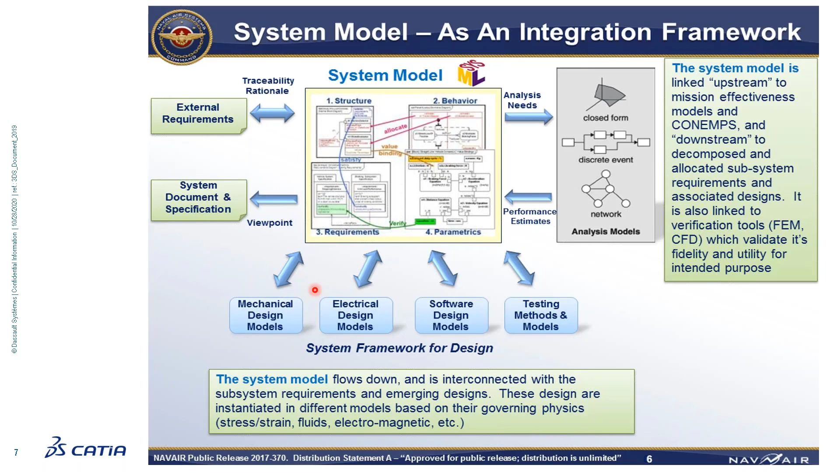So to get into this, we have to talk a little bit about what systems architecture is and what it means and what is a system design. And so the things we talk about here at Dassault Systèmes come from the International Council on Systems Engineering Handbook, that's INCOSE's handbook. And we talk about system architecture, the creation of a high level or abstract understanding of what it is we need to design. And eventually that systems architecture then becomes a system design. And that gets oriented through the logical, physical, structural elements, the details of what I need in my system to meet that high level system architecture or concept of operation.

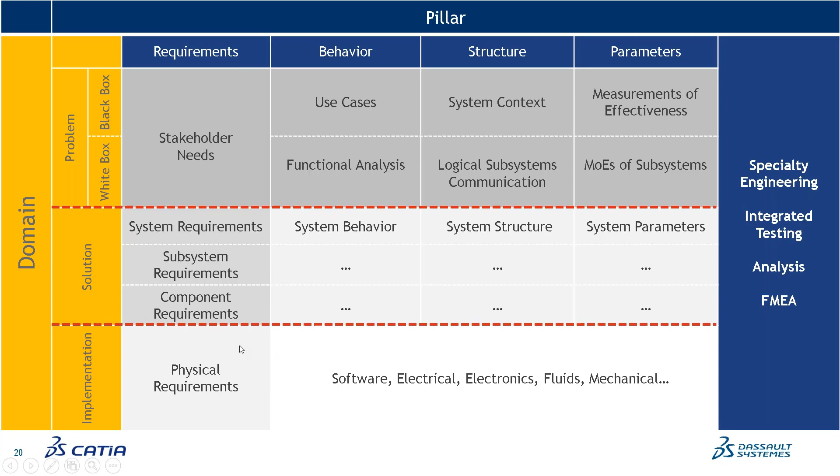So taking this one step further, I'm going to break this concept into 3 layers here. And I'm going to talk about how we solve the first layer. Then we're going to look into how do we do the solution architecture and what we call a logical architecture through the preliminary design review. And then we're going to talk about how we get to the physical architecture and accomplish the critical design review.

So to begin with, we want to get to something called an SRR. Well, how do we do that? We start with some stakeholder needs here, and we develop those, we review those stakeholder needs, and we start talking about, well, when I read those requirements, what do I understand as the system that we would need to solve those requirements?

So I develop things like a use case diagram, an activity diagram, block definition diagram. I can further that with understanding some measures of effectiveness that I need in the overall system. Generally, the stakeholder has some high-level performance factors they need. And once I do that, I can break this down into some logical subsystem. And eventually, as I start doing my work, I can show traceability from the system context back through the use cases, back to the stakeholder needs.

And eventually, through all of this understanding, I can get to the systems requirements, a system requirement table, and a derived matrix that shows me the traceability between the systems requirements and the actual stakeholder needs. Well, that's all fine, but how do I actually do that in the model?

So I'm gonna come out of my presentation here and let's talk a little bit about Cameo Systems Modeler and how Cameo Systems Modeler works using model-based systems engineering in the systems modeling language. So this is the graphical user interface. This is the screen you use when we actually do system design here in Cameo Systems Modeler. And the big thing to look at here is this containment tree, over here on the upper left-hand side, and this shows us our model.

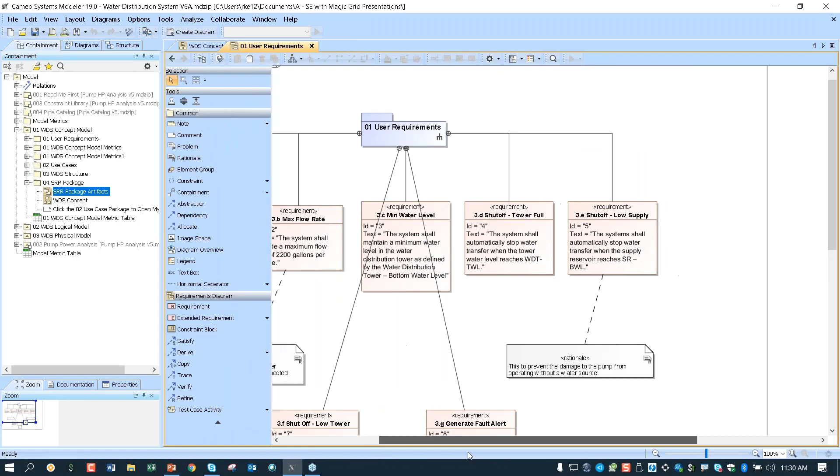And the containment tree shows me the relationship between things, but I'm just going to walk through the diagram. So here, to begin with, I had some user requirements, and I can express those requirements by this diagram. So here is a typical systems modeling language diagram with several sets of requirements, and I have some rationale associated with them. I can also express that in a table here, which gives me the name of the requirement and any rationale that I have on it.

And if I needed to here, I can modify this table, and I can show the text of the requirement. And so when I do that now, it added the text in the table here. But now I see the name of the requirement, what the text is from the user, and what rationale I have provided for these requirements.

So use cases. I said I was going to create some use cases. So the use cases are here in the model, and if I look at my use case diagram here, I can see the use cases that I have in the model. But if I go back in here, I can show from this diagram, I created these use cases. These use cases have some relationship to the requirements that I have.

So here's my user requirements, and I'm showing that these use cases are used to satisfy these requirements. And I use the relationship called refine to do that. And I can see that all of my use cases have at least one refined requirement to it, and all my requirements are represented in at least one of the use cases. So I'm doing some model checking as I'm going along to do this.

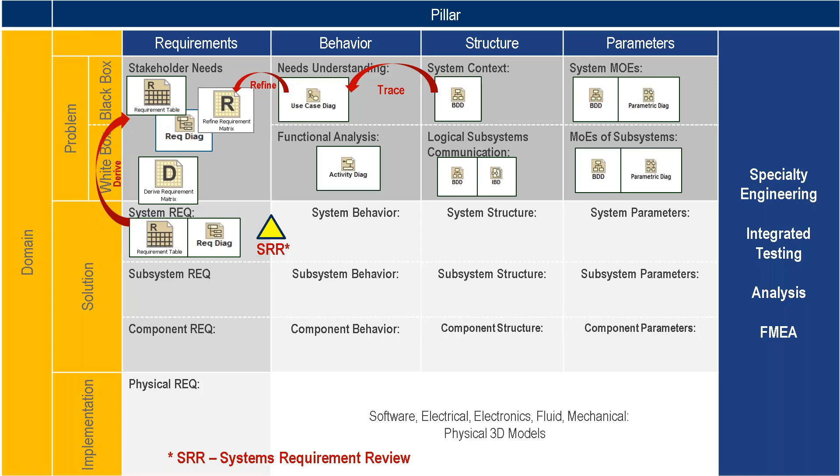So going back to my presentation here, I have gone through this analysis to get to here, right? So the next thing I want to do is work down to getting a preliminary design review. So this design review now requires us to build out the system structure, understand the subsystems, get the behavior and those sorts of things now.

So again, I work across these rows. I have requirements. I can understand reading the requirements. I understand what systems behavior I need, what sort of system structure I need, what sort of system parameters I need. These things have traceability. And from this system level, then I can also look at the subsystem level. What subsystems do I have?

When I make the system structure up here, I get to a subsystem structure. I look at the behavior I need to have, allocate that onto a subsystem structure, understand what parameters I need for the individual subsystems. And I understand now that I have these subsystems with requirements, and I have to trace from these individual subsystem requirements back up to the system requirements, so I can do all that and eventually get down to some individual components that I think I want to design and what the requirements are for those components.

So again, I can express all of this in my model, and I'm going to come out of this PowerPoint slide here for a second, and I'm going to go back into my design model. And we'll look here now at what the logical model tells us. What is the design of the system? What requirements do I have? What structure, what activities, what parametric analysis am I going to do?

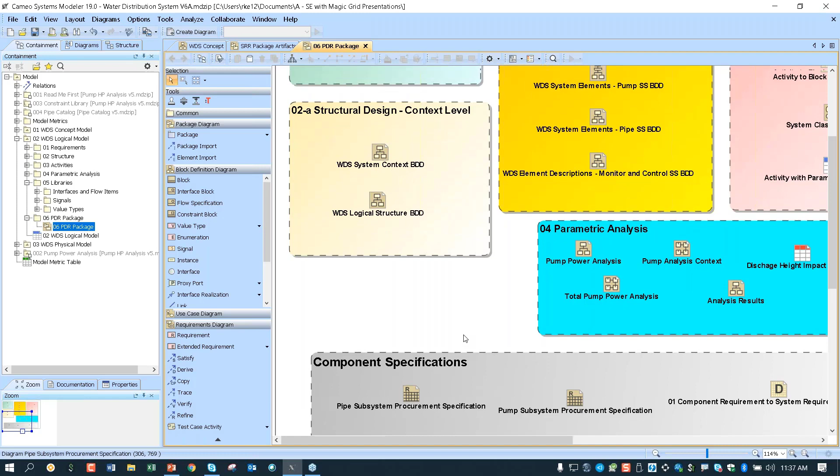So let's start up here. We have a systems requirement table. So these are the systems requirements, right? This is the systems requirements that I started with at the very beginning. From those requirements, I'll come back to the satisfy matrix here in a minute to look at the system elements that are there.

But now I would start to look at what sort of activities do I have. So here I may have produced, for instance, this little activity diagram that shows me which components of my architecture are doing which functions and how it does that. And just very briefly, these activity diagrams, state machine diagrams, things can be simulated. I'm just going to run through a quick simulation here so you can see how we do this. We basically walk our way through the design, and the simulator will check on how we do things.

It's going to ask me, oh, did you want me to turn on the pump? Is the water level below maximum? So if the water level is less than maximum, yes, I'm going to turn on the pump here. It's going to continue to work to detect water. Is it greater than maximum? I'm going to say no here, and I'll say no for this one. This will allow me to continue to go over here.

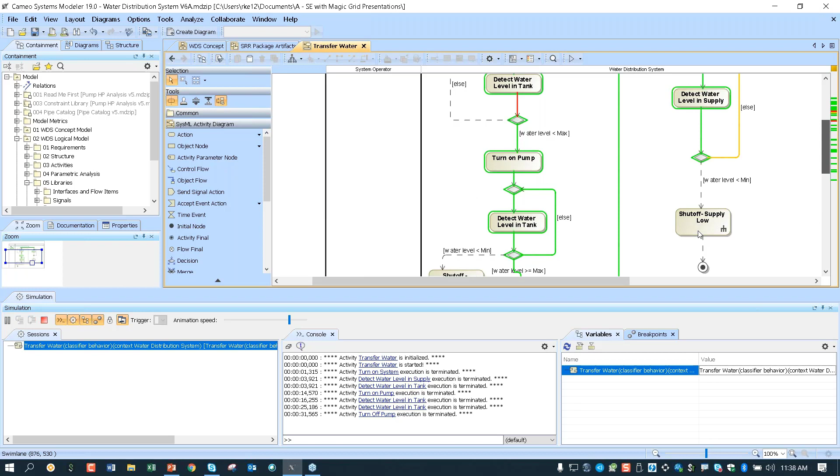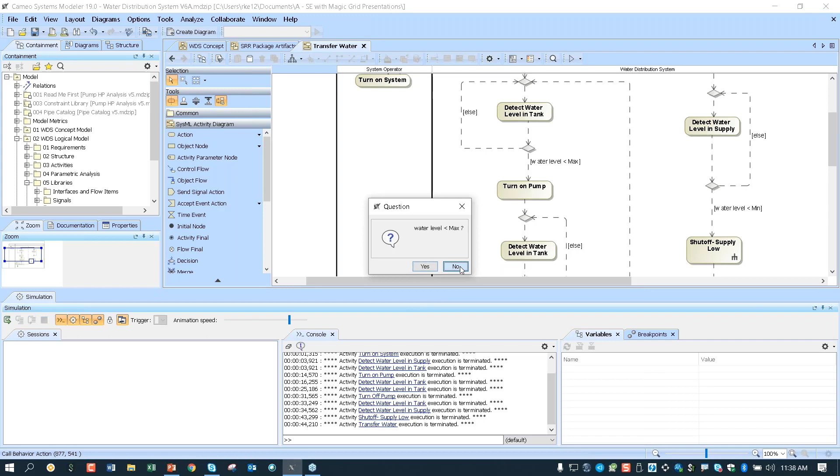Now let me get to a water level. I'll say yes here, and I'm going to say no here, and this will give me what we call a low supply shutoff. Is water level less than minimum? We say yes. This will give me a low supply shutoff, which is telling me that the system detected a low reservoir level, and that is what caused my system to stop. So there's more to this diagram, but I just want to get back into my systems model. So that's the type of behavior analysis I can do.

I can also do state machine diagrams. So this is the system classifier behavior for the tank. There's another simulation that goes on here, but basically it tells me the state-based behavior of the system. And all these, the state-based and activity diagrams, end up going into your safety analysis and things like that in your system design. I can show activities, and I have a number of activities here, and those get related to the blocks in my system. So I take my activities, I allocate them to a physical architecture.

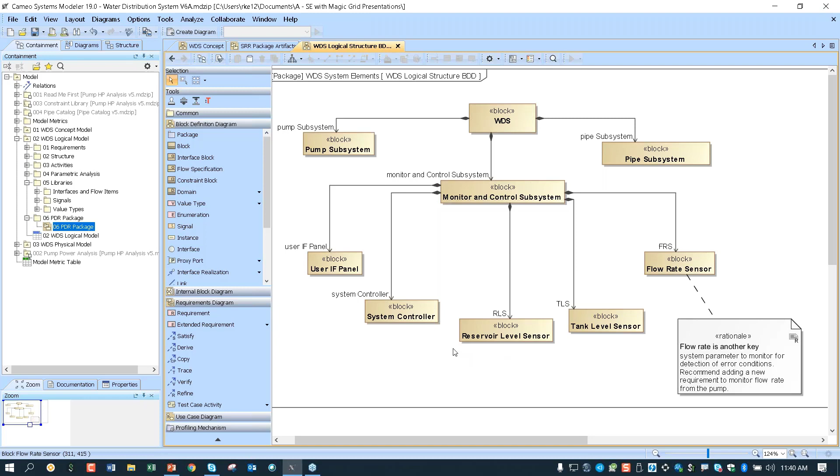I can see over here the system context, BDD, and then I got more detail here in the logical structure. So the WDS system has a monitor control, and I have all these individual system level elements and sensors that are there because of the analysis or the requirements that I had. Then I also have the notion of interface diagrams here. So this is the system controller and what interfaces it has to have with either internal or external things.

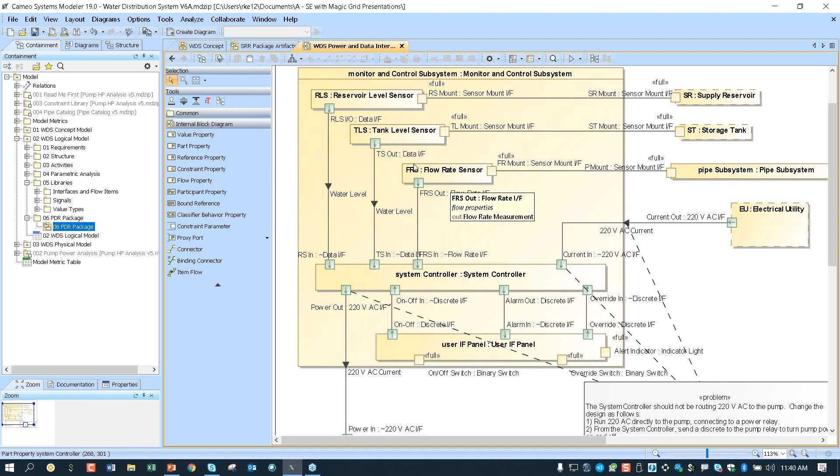I can also look at how the water is flowing through the system, from the reservoir to the pump system, from the pump into the discharge piping system and up into the storage tank.

So those diagrams all express certain things I learned from doing the analysis from the systems, from the requirements to the functions to the system level.

I can also look at then, how big of a pump do I need to have? How does that pump work? So I have a notion of what the water distribution system needs, and I compare that to the actual total pump power analysis, which is a used model, and I can then do some analytics there.

But eventually I can then also get into an analysis here that tells me things like, if the discharge level is only 62 meters, then I need a pump that has 168 horsepower in it. But if I have to go to like 100 meters in discharge height, through that parametric analysis, I can simulate that again, and it shows me that now I have to have a 251 horsepower pump.

So the discharge height, as well as I could do another analysis to say, if I have to pump further, how is that going to affect my system? So now I can look at trade-offs, or I can look at when I survey the actual site, if I have 250 feet, then I only need a pump of this length, or if I survey the site, I realize that tower is really 100 meters away from the pumping station, then I may have to get a different pump. So that allows me to do the trade-off analysis within the model.

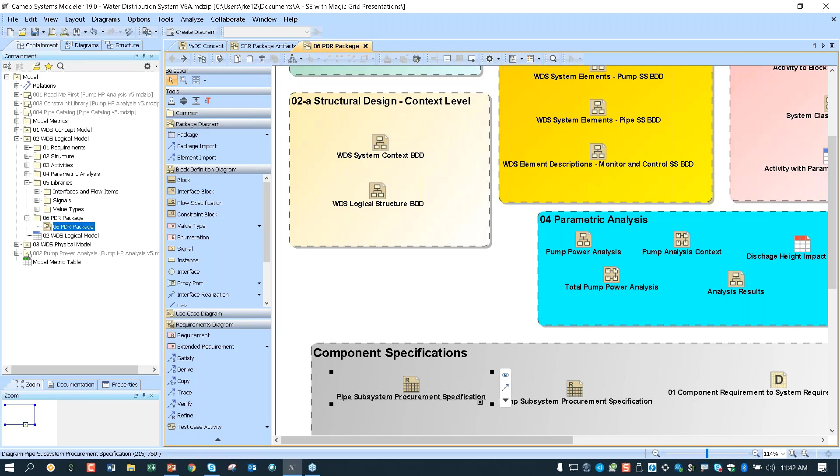And eventually then I can get down to understanding individual procurement specifications. So on the pipe system, I'm going to have pipe with certain qualities in it. How many do I need? What's the roughness factor? What's the diameter of the pipe? Things like that.

This gives me the total pump power analysis. This is another diagram. This is showing me the actual equations and how they relate to one another and how I get input equations to put in there. It's all part of my simulation engine in the system design.

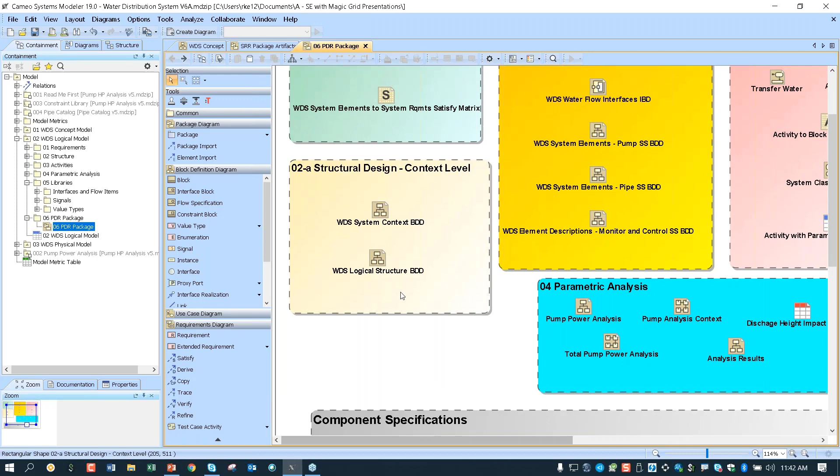And so I wanted to go back up here because I have system elements and then I have subsystem elements. So now I can look at, well, here are all the systems requirements that I had. How do those requirements relate to the functions, which are in this part of the model here, and the components that I picked for the system, and I can show that relationship between those two. So I have what's called a satisfy relationship to trace through those.

Now, what's interesting about that is if I was to say something like, I want to switch out the flow sensor. Well, if I'm going to switch out the flow sensor, here is the requirement that the flow sensor meets. And though I don't have it on this table, I can track from this flow sensor to the requirement and actually to the test case that I did to test that requirement or to test that flow sensor. So when the model is built out, when I go to buy flow sensors, I know what requirement those flow sensors have to meet and what test cases I need for those flow sensors.

Going back into my slides here for a second. So I've shown you how to build through all of these things to show the satisfy, derive, and allocate requirements here.

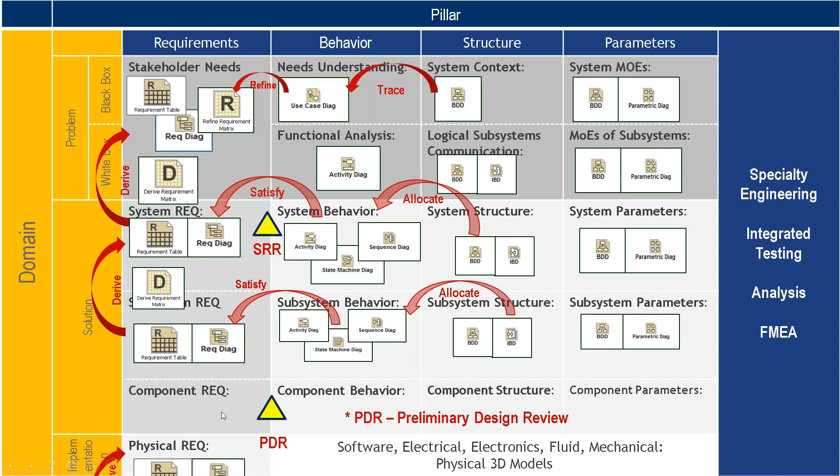So if I go back into my model here, I end up with a physical model and I end up with individual requirements here for individual systems. And I can look at things like the derived matrix to show me what fittings are needed or how the flow rate requirements get broken down into individual requirements on components here.

And this will show me things like the parts tree. So I need a certain number of parts. Here are all the parts I need. And I can show in the model, I need different sections of piping with I need 1 meter section piping. I need 6 of those.

I need 10, 20 meter pipings. Here are all the fittings that I need for the design. Here are all the sensors I have to have for the design. Here's the harness cable and what needs to go into it. But again, those are all represented again in a package environment here.

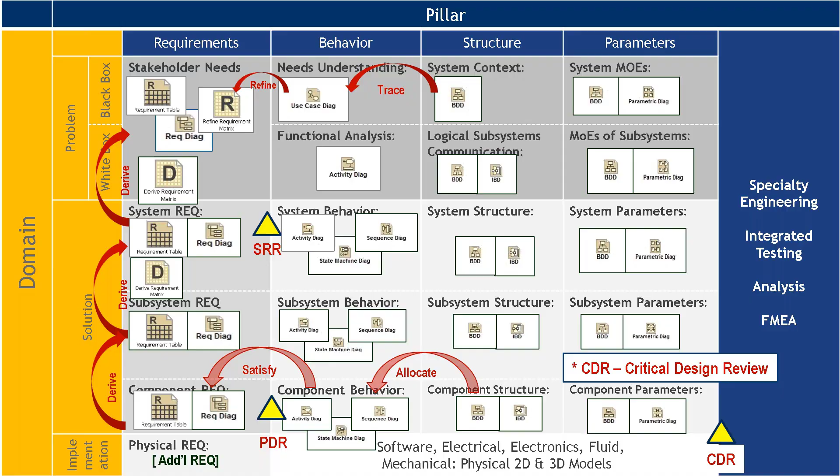So what I've tried to show you here is the fact that I've taken some initial stakeholder needs, and just through the 10 or 12 requirements that I had here as stakeholder needs, I went through this design process using the systems modeling language in the model-based system engineering toolkit, called Cameo Systems Modeler, and I went through and made a very descriptive, detailed design, which would then be backed up by other things in our platform.

Cameo Systems Modeler is right here. It's the system design tool set. We also have a software design toolkit called MagicDraw, which uses UML. And we have Cameo Enterprise Architecture, which does more of the enterprise architecture things. And I also used in this the Cameo Simulation Toolkit to show how I simulated things.

And the rest of the platform, you'll get some understanding of that when we go to the next couple of lectures. So I'm going to turn it back over.

Do we have any questions on this?

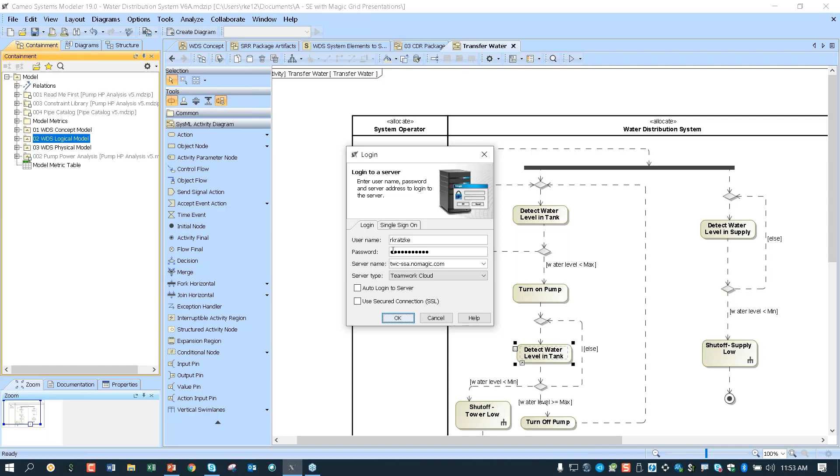I can log in to a Teamwork Cloud instance, and when I log into Teamwork Cloud, I can take a project off of it and start using that project. Let me show you here - I can log into our company's Teamwork Cloud. When I get in there, you'll see a number of different models. On the systems engineering team, we're sharing all these models. Let me find the systems modeling language 5-day intensive class - here's the actual model I have.

I can pull the model in, lock elements, and make changes to it, and two or three of us can be working in the model at the same time. We just have to work in different areas - we can't change the same element at the same time. But if I was doing functional analysis while somebody else was doing requirement analysis, we could be in the model at the same time, and it updates in real time as we add our changes.

There's lots of ability here to do role-based access. I could be a reader, a reviewer, a manager, those sorts of things. So there's a whole collaborative aspect to being able to do this model-based systems engineering.

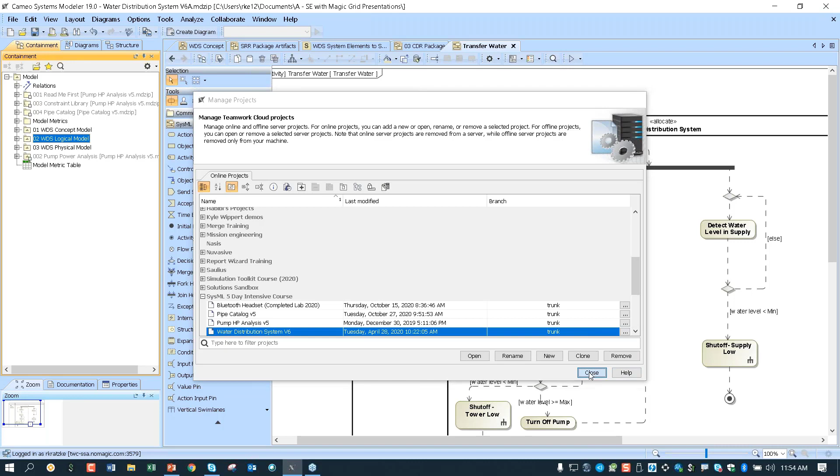Excellent. The next question: is there a connector to Simulink? Yes, there is. Simulink is a MATLAB product, right? Our simulation toolkit can connect to Simulink.

I don't have a demonstration here, and it actually wouldn't work because I don't have a Simulink license on my desktop computer. But let me find a particular model here that you guys would probably resonate with. Let me go to this analysis package in here.

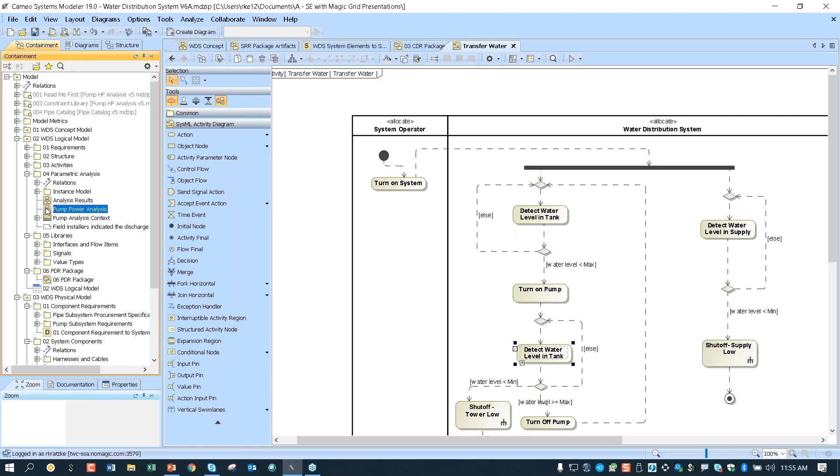I can take a parametric analysis package like this pump power analysis here, and here is the actual parametric diagram. So I can connect this to a set of equations in Simulink, and you'll get a block that shows up here. I can make my connections here to Simulink, have Simulink run the simulation, then push the values back into the Cameo systems model.

Perfect. The next question: how do we get information out of the MBSE model into a format that I can use to review with my customer? So there's a couple of very basic, simple ways we can do that. One way, and one thing that a lot of people do is, I'll go up here to my SRR package. I can look at any one of these tables.

Let me grab a table here. This is a table with rationale, and I add rationale in here. So I have the ability to synchronize this with Excel files. So I can take this table, put it in an Excel format. I can edit it in Excel, and then I can push changes back into my model. The other capacity here is, of course, I can also take out any individual diagram and put it on a PowerPoint chart for someone to look at.

There's a feature called Cameo Collaborator, which basically publishes the model to a website so people can look at it and they can make comments to it. They don't have to have a license. You publish it to a website. They can look at a diagram or a table, and they can make a comment on it, and you can bring those comments back into the model and then adjudicate them.